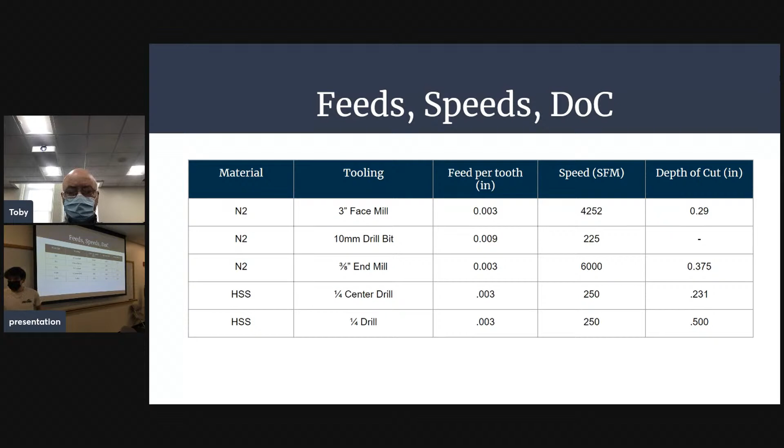And then we got our feeds and speeds somewhat ready, as you can see here. These are some of our most common tools that we need for the parts that we're making. A couple of us were able to get our CAM software to run. Here's one example of the sliding jaw. This is the part that will actually crush the can within the body.

So again, like we already kind of talked about, our next steps are to finalize our simulations and tool paths, meet with Hayden to really solidify our understanding of Esprit and CAM, just so we have the confidence to make the decisions we have to. We want to begin ordering our stock material and hardware, and then officially finalize any design changes that we have to. And then again, we want to have 1 to 2 of the simpler parts ready for next week. And yeah, that's our plan so far for the coming week.

Any questions, suggestions, comments? Feedback from the class. Yeah. In terms of feedback, I would just suggest a few more visuals. I think that might be useful for the audience. Okay. Anything else?

Could you go back to the slide where you had the simulation? Could you talk us through the operations here and what the tooling is? Because it's hard to see it on the video. Yeah, so this actually is neither of ours, or is this yours? So do you know how tall that part is? How deep does that mill that goes around the side go? So that would be the sliding jaw. So it's 3x3x6: 6 inches wide, 3 inches tall, and 3 inches deep.

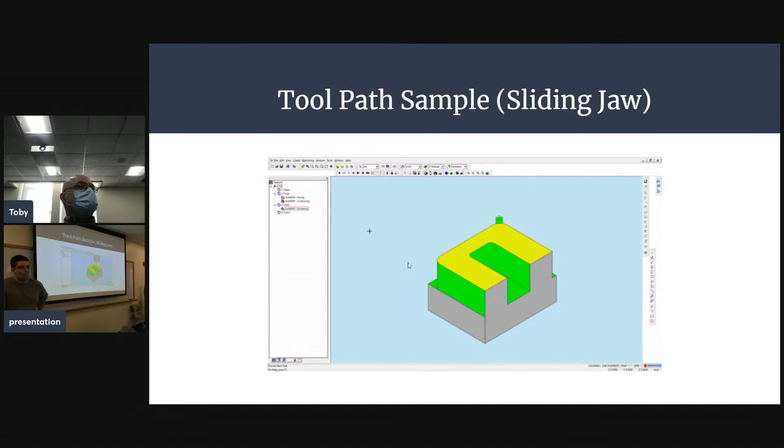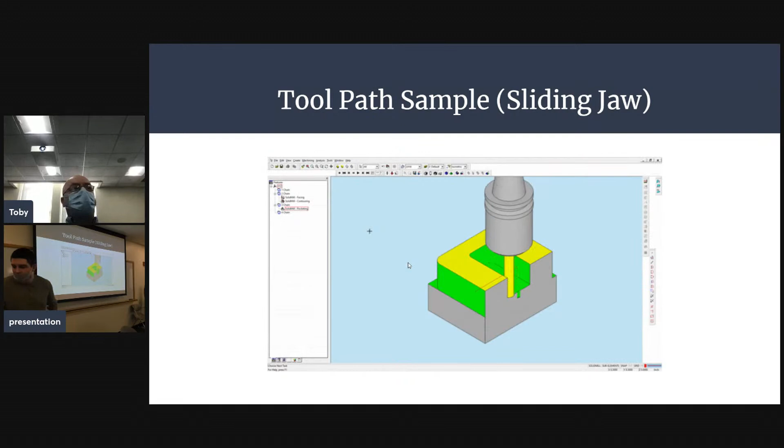So if you've got unlimited time, this wasn't the class where I drew the graph about time and motivation, right? That was my other class. I have these 2 classes this term, so I get confused about which one. You guys can sit down, I think, unless there's more stuff from the class.

But if you think about it, if you've got an unlimited amount of time and you've got a hard task to do, even if you don't know how to do that task, you have basically infinite ability because you have a chance to learn how to do that task. As time compresses, the apparent skill level, that's your actual skill plus your ability to learn, comes down because you have less and less time to learn stuff. Eventually, there's no time to learn, and your apparent skill level equals your actual skill.

So think about the axes: time on the horizontal axis, and on the vertical axis, apparent skill level. But you can put another axis up there that says motivation, right? When you've got a project and an unlimited amount of time to do it, you have pretty low motivation to work on it. As the time gets closer, the motivation skyrockets. So you can imagine parabolic curves that cross each other. Motivation's going up and skill level's going down as you get to the time. And so I worry about that moment where the two graphs cross.

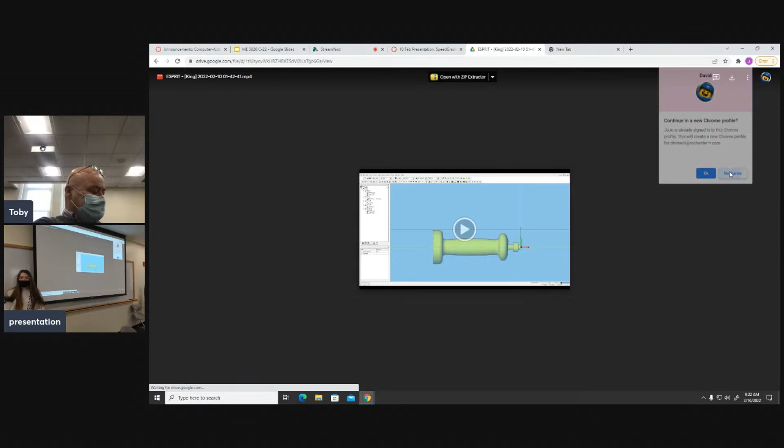That's funny. I was really mad yesterday because somebody had borrowed this cable and not returned it to the place where it's supposed to be. It was you. I am certain that I remember having returned it after I borrowed it. Somebody must have snuck in after I was done and put it back in my bag. That seems the most likely. That's what happened, right? Yeah, totally. Was it you? You know, lightning cords all the time. Okay, so. I'm still certain I'll make a change. If I'm really mad, I suppose the more accurate description would be mildly annoyed.

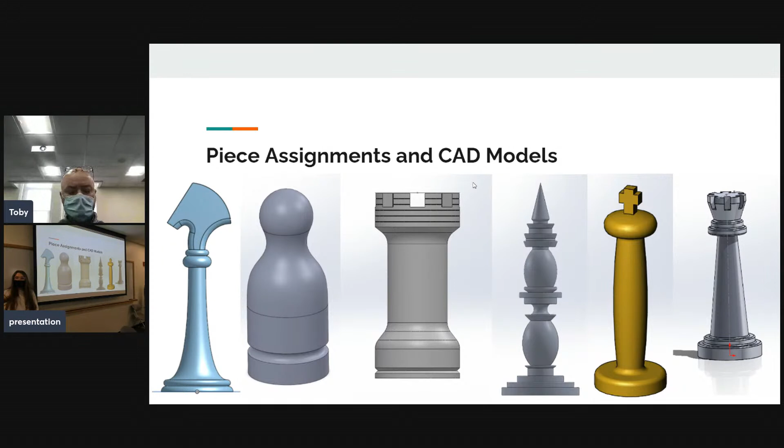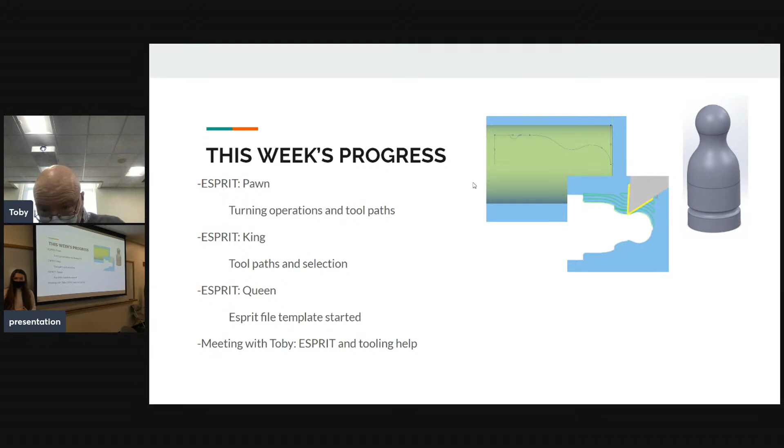This is just our CAD models we've seen previously. So this week, we got to Jackson, and David and I went to the lab yesterday together, and we worked on Esprit. Jackson got really far in his part. I don't know if he included a simulation, but probably, because we still need to work on it. I think there's a collision or something like that. But yeah, those got started this week. Yeah, I actually included my simulation. I finished what I have last night.

I'll play the video, but before I do, some of the things that I'm having trouble with currently: the left-handed roughing pass takes off barely any material, but it does a lot of passes toward the part and it doesn't actually cut much. So I'm wondering if maybe I can just skip the roughing pass and just go to a finishing pass on it. The finishing passes themselves still need a little more fine tuning, just because I'm a perfectionist and I want to get it as close to what I want the part to actually look like. And then finally, there still needs to be a milling operation on the front end of the king before it's ready to go into the machine. This is what it looks like.

I'm gonna go full screen. Nope. So it does its facing pass here, and then I used a grooving operation here to cut out the little crown shape at the front. And then it does roughing passes with a right hand 55-degree bit. And then it'll come back with a 35-degree bit and do a finishing pass. And then this is the left hand roughing pass I was talking about that kind of does nothing. That comes in, and then we cut it off. So that's that. And then the next slide. Nope, that's not what I wanted to do. How do I go to the next slide?

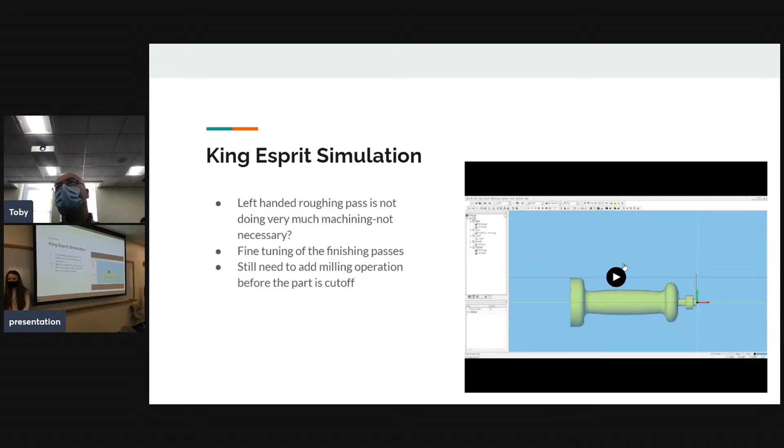You go ahead and pause the video.

So the nice thing about the way they're doing it here in this particular cutting path, because that is an issue, and it totally could happen. But with the way he's doing this cutting path here, it's pretty small cutting force. He's making a really small chip, and he's only making a chip at the small surface for an instant. And then he moves over to where it's a big, thick surface. So it's being supported very close to where he's cutting, which is one of the reasons that this tool path makes it a little bit easier to make that small diameter.

The other thing you could do if you're doing a regular turning operation and you just needed to make a really small diameter there is you can actually have your tool path be at a 45-degree angle. So you gradually come down to that slope, and you can have it rough the material away in little 45-degree chunks, and so you're only at that small diameter for the last part of the cut. So that's another way to do it.

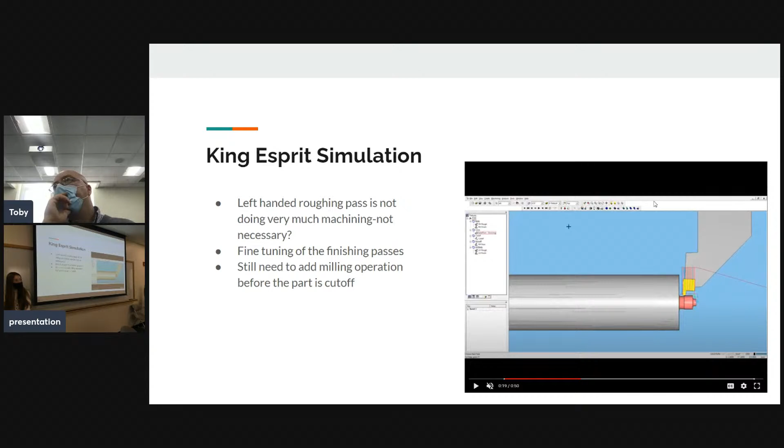Anything else from the class? I just have a general question. When they have this first operation, when you put that into the mill and you have to do that simulation, will it start by showing how you put it in? Yeah, so even like the last one, where they were going to flip the part over. You get your stock material based on whatever the stock's going to look like. You do that simulation. When that simulation is finished, on the simulation toolbar, one of the items is save stock as STL. You click that, and then you can output an STL file that is what Esprit thinks the part's going to look like. And then you can load that in and use that as the stock for the next part.

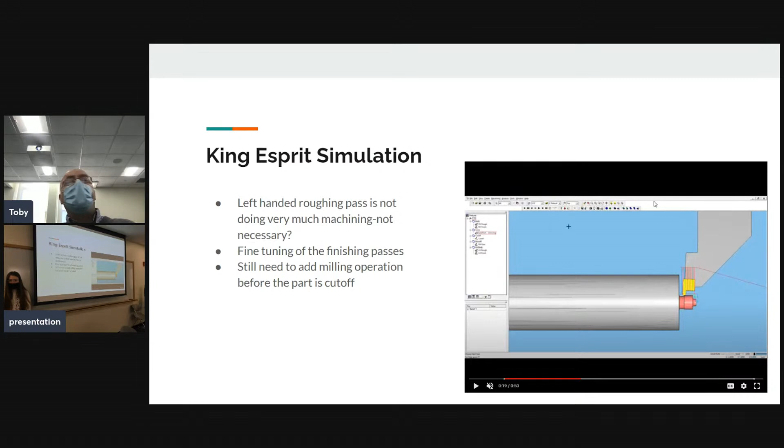Anybody else? All right. Group three. I wasn't sure if you wanted to talk about that. Oh, we could, yeah, go back to the other video. I had forgotten.

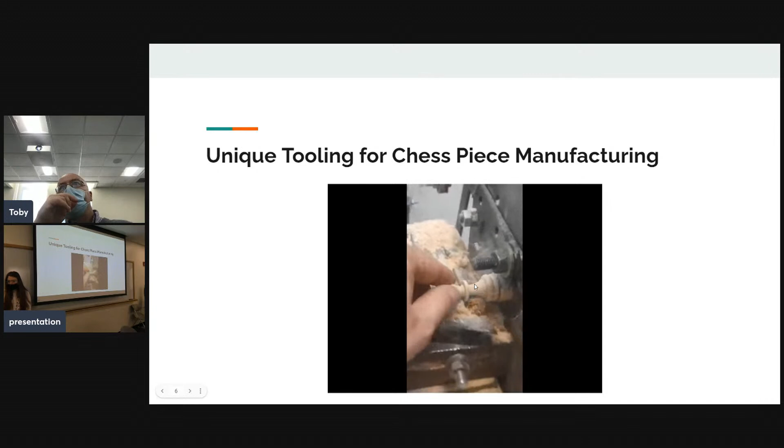And so this is a pretty common thing to do in production. What they've done is they've made a form tool that is the shape of the part that they want. And they've got a progression of form tools here, so it goes across one. I don't know that you can see this, but the wooden piece is rotating. So that's turning on like a lathe spindle, and it's feeding across the two tools there. And so you could do that.

So this particular example is with wood, but you could do the same thing with metal parts and things like that. You'd have to take smaller chips, so it might be a longer process there. And it's very common in grinding operations. So you want to make a specific shape. What you'll do is you'll form a grinding wheel to be that shape that you want. And then, if it was a turned part like this, you'd spin the workpiece, you'd spin the grinding wheel, bring it together, and it will grind it away, and it'll make that shape all in one setup.

So I just wanted to bring that up because that's not something that we talk about often with CNC machining. We don't take shortcuts like this because we could just go across and use our regular turning tool to make this shape. But I think we do ourselves a disservice to not think about how we can use physics to help us out. And so going back to some of these older processes and then adapting them into your CNC setups, I think can be a big help, especially to speed up production. So I just wanted to bring that up as a topic.

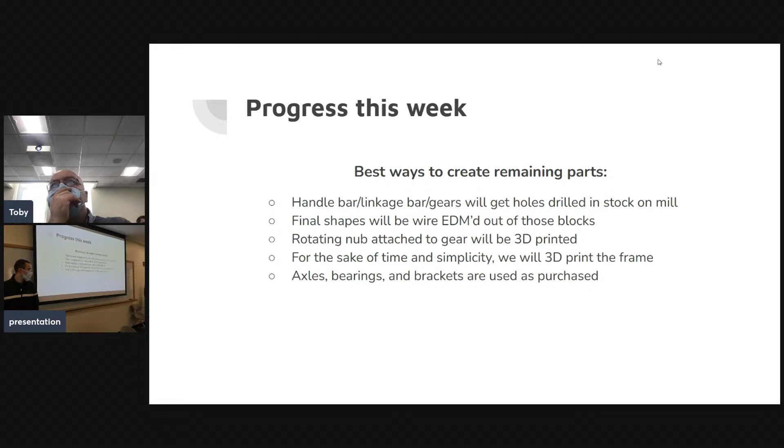So the best way to create some of the remaining parts for the handlebar and the linkages, we're going to drill the holes in stock on a mill, and the shapes will be cut out using the wire EDM. And then the nub that's attached to the gear, like the linkage rotates the gear with it, will be 3D printed. We're working on printing the frame. The axles, bearings, and brackets will be purchased.

Some issues we ran into this week when doing the Esprit for the wheels, the tool path just kind of ran straight through the part. So we're working on fixing that when we run the simulation. Group 2 knows how to solve that problem. Okay. And then we had a little bit of issues getting the parts from Fusion 360 into Esprit. And then we're not really comfortable using the wire EDM unsupervised. Good.

Some progress that we're looking to do for next week. We want to create all the Esprit files for all of our parts, begin producing our parts, design any additional 3D printed parts that we need, and print all of the parts. Does anyone have any questions? And just as a reminder, this is what we're going to be purchasing.

Question? Just out of curiosity, you picked 3D print for the frame over laser cut, just by chance? So while the laser cutter in Washburn and in Foisie is very large, the frame is going to be quite large, and purchasing actual wood for that rather than just 3D printing the frame out already assembled seems much simpler. Okay. 3D printing parts of the frame, I should say. Okay. Yes. Do you guys have a model for the? Yeah, we have a. Put that in the presentation. It was in one of our last presentations.

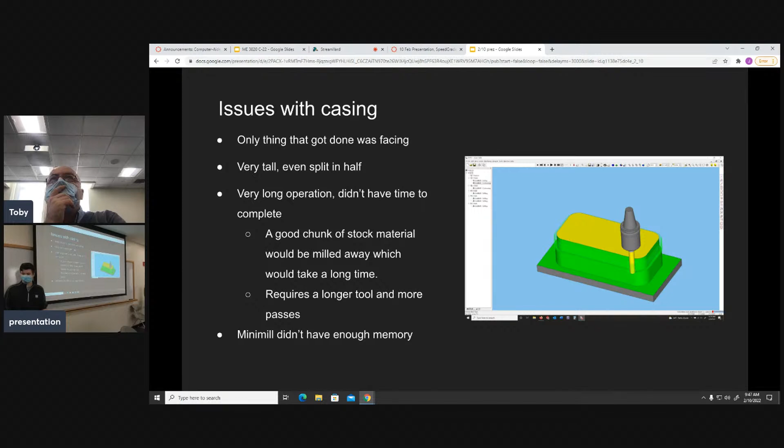So for creating a toolpath for the wire EDM, first you have to bring in whatever solid model of the thing that you're going to make. To actually get it from being the 3D model to just being flat with the toolpath around it, I don't actually know how to do that. We kind of had that part done for us, which is nice. Save it as a DXF. Well, okay, save one face as a DXF in order to import it. So just save the face then. And then bring it into Esprit.

And then for creating the toolpath, you create the chain. You can still auto chain, you just have to make sure you start it at a spot where you actually want it to start. Because if the beginning of the chain is at the wrong spot, you kind of just have to redo the chain. At least that's what I found. So just try to get it right on the first one.

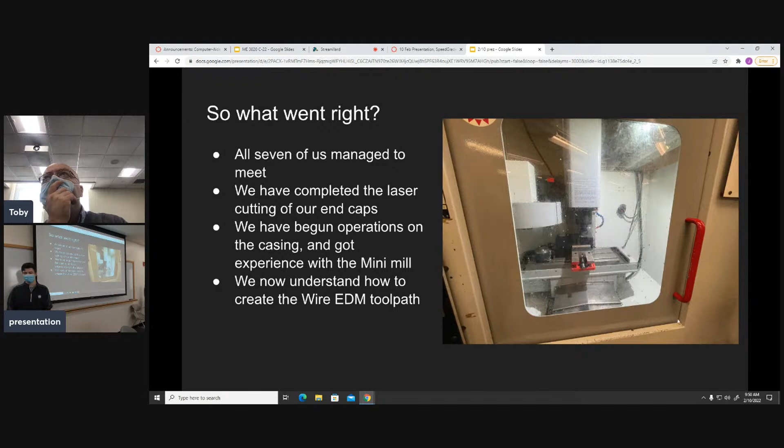What we plan to do by next week: we plan to complete our casing by next class, hopefully. As Nate mentioned, the facing operation is done, and the part has been cut closer to size to reduce the time it would take to run the operation. We want to make some minor edits to the assembly to include the keyways we've been talking about, and maybe some small aesthetic changes. Then we want to figure out the dimensions for our keyway and begin making the toolpaths for our screws.

Any suggestions, comments, or questions? Are you going to wire EDM the hole in the gear and also the teeth on the outside? Yeah, I think that was the plan. Because could you just wire EDM the teeth and then just drill the hole in the center of it? We also want to make a keyway so that it'll transfer power to the shaft. Yep. That's why we need to edit the model so it actually includes it. We have the keyway right in there.

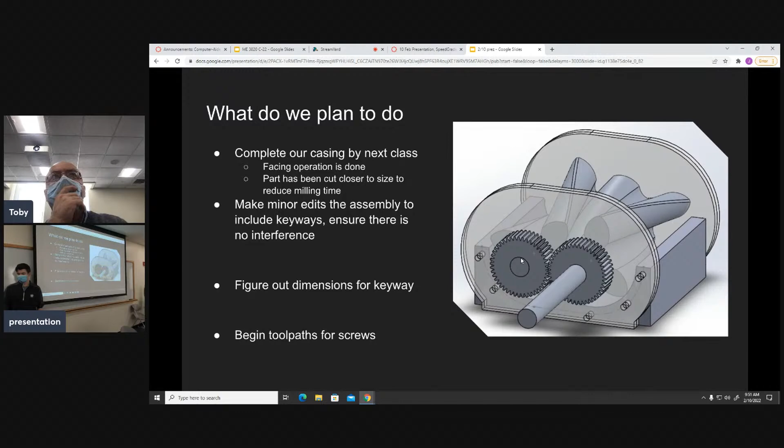When you were talking about choosing the right start point for your EDM chain, what exactly do you mean? So if you just do auto chain to make the path the tool is going to follow around the outside edge, at one point in our process the chain started somewhere down here, but the beginning of the actual toolpath was up here, so it cut all the way through this to go down here. So if we wanted to move the beginning of the chain, which is where the operation should start, we just have to select the right point for starting the chain.

Okay. In the advanced features toolbar, there are two toolbars that open up when you do the features thing. One of the icons there is an option to edit a chain, and you can move the start point. I have always found it easier to just create a new chain that has the start point where I want it. So I don't typically use that feature, but I know it exists, and some people like to use it all the time. I always find it faster to create a new chain that starts at the location I want and goes in the direction I want, rather than try to remember how to use the edit chain feature, because I have to go look up the help and figure it out every time.

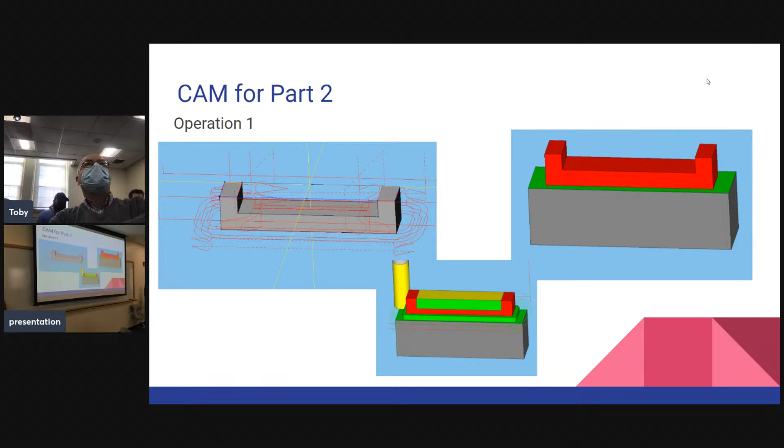So looking at this setup, we were trying to figure out the best way to set these up, and we figured that it would be best to go with the origins made from SolidWorks and then open them in Esprit. So moving forward, we moved on to making CAM operations for part 2. It was set up in a stock in Esprit. As seen here, it goes through quite a few operations. The first operation is mainly just to get the right shape. The second operation just cuts the whole thing off through what looks like a facing operation. Is that correct? Yes, okay.

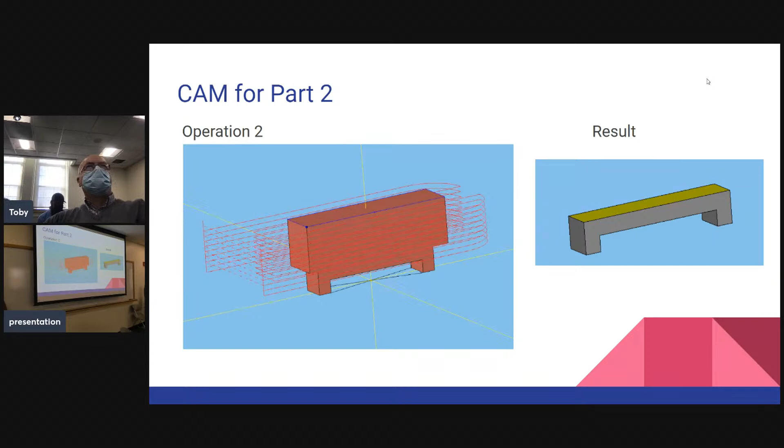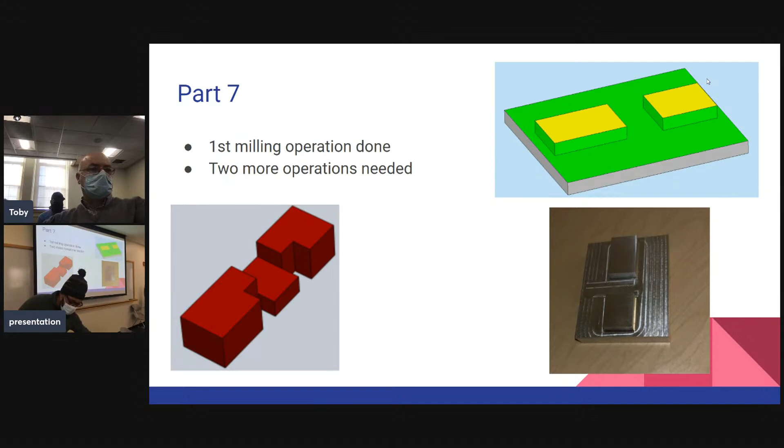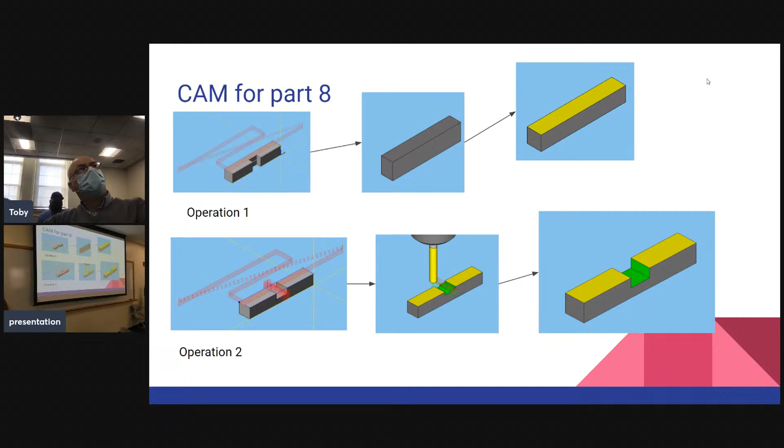For facing operation, let's see, part 7. That's actually one of the parts that is already finished right here. So a milling operation, and it still has 2 more operations needed, but so far it's already getting somewhere. And this is part 2, already milled out and finished. Moving right along, we're also working on the CAM for some of the other parts. For example, part 8 used a few different facing operations and didn't really go for any contouring, mainly to maintain the sharp edges through the process. So far the simulations are looking good. We hope to do some actual machining of these parts later on.

So now for the tool paths, it did take some of us a bit to learn how to use it. This is one that is relatively done for the tool path. The simulation turns out okay, so this is what the finished part will look like. And then this is one that I was doing. I have a staircase, and I started on tooling paths, and it did this, which is clearly not what we want. So that's one of the challenges we've had in the group in trying to get our tooling paths correct.

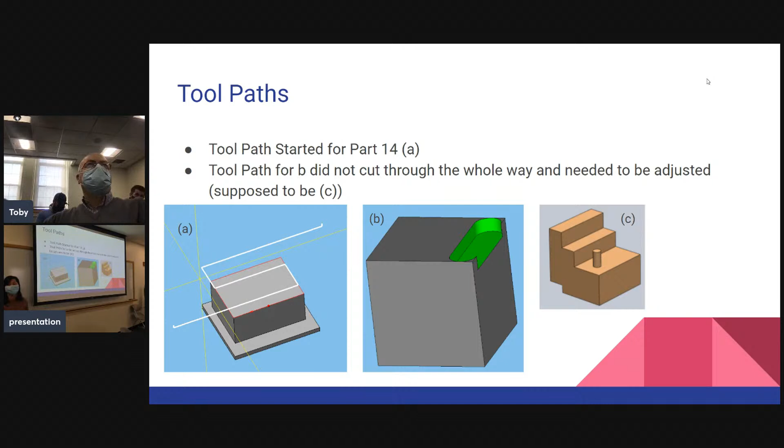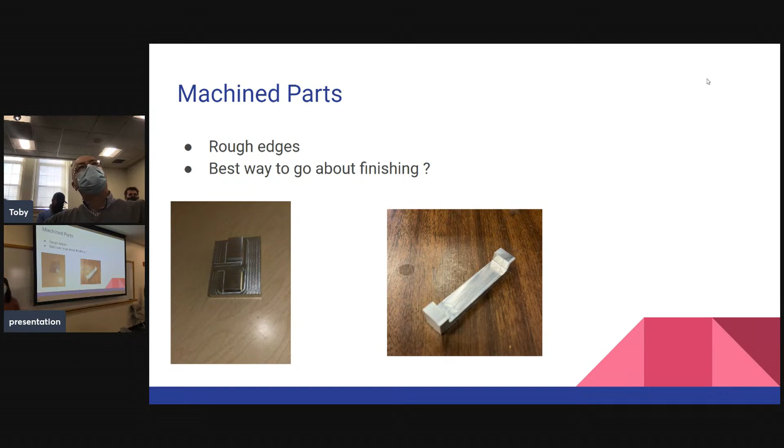And then finally is the machined part. So we brought them in, and these are the 2 that we have so far. Currently we're still trying to figure out the best way to finish these parts. Yeah, I guess that would do it for our presentation this week. Any comments, questions?

How many parts are you guys making? 13? 13 technically, I think 16 or 17 based on duplicates. Do you guys have a backup plan in case the tolerances don't quite work out? We're probably going to have to go back to edit the model and add some higher clearances and make sure they all don't add up to failure.

You could also get a bigger hammer. Or that. Or we could use files, but that's technically handwork, so I'm trying to avoid that.

Anybody else? So I actually have a question. So when you've been in the lab working and you had questions, how hard was it to find someone to answer the questions? So I've actually been in the lab with Nick most nights. Okay, so you know Nick, and you know he knows the answers to the questions. Got it. And he's been helping me.

How about the rest of the class? When you've been in there working on a project and you have a question, how hard has it been? And I'm asking this because I want to try to make it easier, but I'm trying to understand what the process is. So is it always obvious who can answer your questions, or do you have to search around? Some of you say it's obvious. Some of you say you have to search around. Yeah, what do you got?